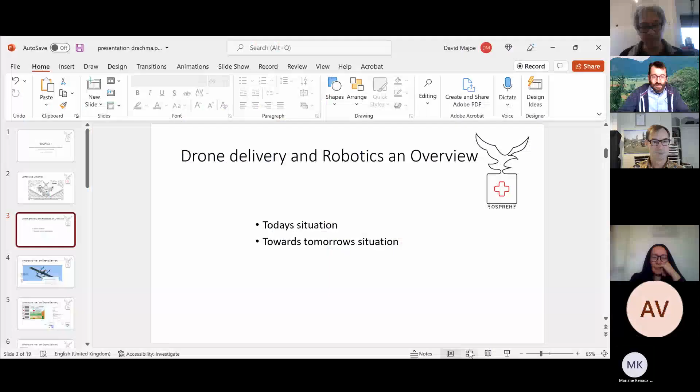If you hit the button that says share with the arrow going up, I think we're all masters now. Paul, I think it's Dennis actually first up. I'm sorry, Dennis. When I click the button going up, it goes close share tray, but it doesn't show me the share tray, does it? Oh, okay, yes it does. Window, I'm hoping the presentation works in normal presentation mode. Yep. In which case, Dennis, that's looking fantastic. Thank you, David, for correcting me there. Do you end up seeing anything other than my screen? Well, we can. There you go. That's brilliant. OSPREH, optimizing speed, productivity, resilience, and efficiency in healthcare. That's your presentation. Fantastic, so I'll kick off.

It's 15:04, I've got up till 15:24. In theory, OSPREH stands for Optimizing Speed, Productivity, Resilience and Efficiency in Healthcare. It was a 1-year Innovate UK project which recently ended at the end of March - January to March. It was between 2 companies, Apian, who I think a lot of you know about, and Motion Robotics, perhaps less so.

During the project, we made a coffee cup, and this is the graphics we used. In fact, Paul, I gave you one - a coffee cup, I don't know if you still have it. This is Apian's logo, this is our logo, and OSPREH was the logo for the project.

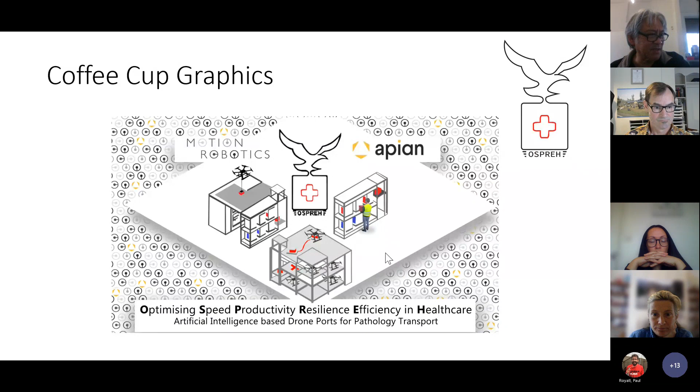As you can see here, we've got little drones and parcels, and it's really much looking at artificial intelligence-based drone ports for pathology transport - that was the emphasis. It was in the robotics AI call, looking at resilience in healthcare. What I'd like to do is give you a little bit of an update on the results we had during the project. But before that, I'd like to put it into the context of how I see drone delivery and robotics being merged together, both in today's situation, from what I can see.

I don't have eyes everywhere - I'm sure you may know of other people doing wonderful things. So what I'm going to present is only what I've seen in the past months and years. So today's situation, and then our results will hopefully show towards tomorrow's situation.

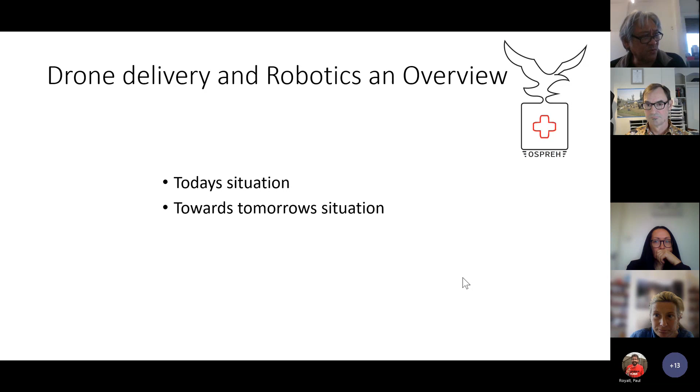Another similar drone delivery system that's working is Manna, operating in the home delivery space. I don't think they're operating at long range, and I think they're mainly operating in areas in Ireland that have geographical disadvantage for delivery by road. I think their payloads are fairly light, consisting of mainly shopping items, coffee, snacks, and so on.

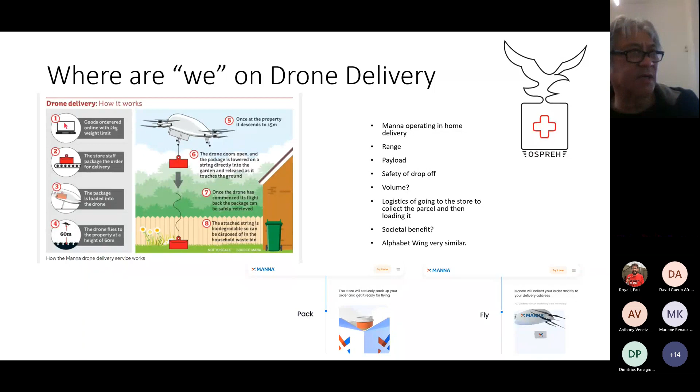So our good friends Apian, operating in the NHS space, they're looking at speed as being one of the main factors they can bring to deliveries in the NHS. They're already demonstrating their range from Queen Alexandra in Portsmouth to St. Mary's on the Isle of Wight, reasonably large payloads and increasing.

They're looking at means to increase ease of loading and drop-off. Not sure that they are focusing on volume, but they are a serious healthcare customer, so they're working in a space that's very credible. And I do believe that Apian and Motion Robotics have the same future vision of how more efficient and effective drone delivery has to be.

One of the most possibly successful in drone delivery right now is Matternet, looking again at the medical space with a very high international presence. I don't think they're looking at very long range. The drones are fairly small, and the payload is intentionally small—small blood samples and so on.

And they're concentrating with their robotic systems, focusing on safety and ease of takeoff and drop-off, which is good. I don't think they're concentrating on high volume, but they are looking at stuff related to societal benefit, and they are serious users of the technology.

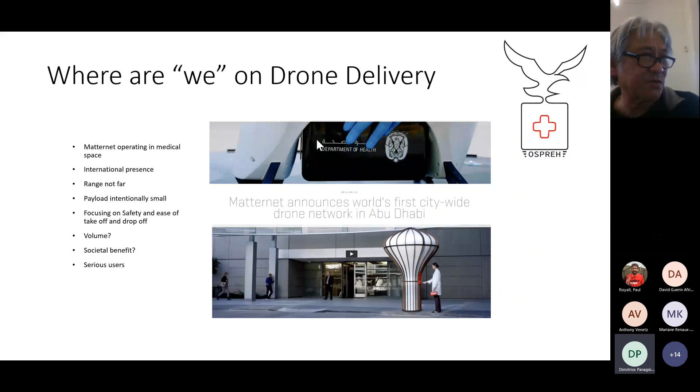So that just gives you my impression of a little bit of an overview of what's happening in the industry. And as I say, there may be a heck of a lot more going on. But I thought, what do we see in terms of automation and robotics?

One of the things is more and more people are talking about winched deliveries. Why? Because it's fast and there's no need to land. But this only partially avoids the safety issue, because you still don't want to drop a parcel, even by winch, onto a dog or something.

A lot of the winch systems rely purely on a hook, and you see the parcel actually swinging around as the drone flies, which is rather bad, I think. And even the basic winched approach over 30 meters, you're going to get a lot of pendulosity in even the slightest of winds.

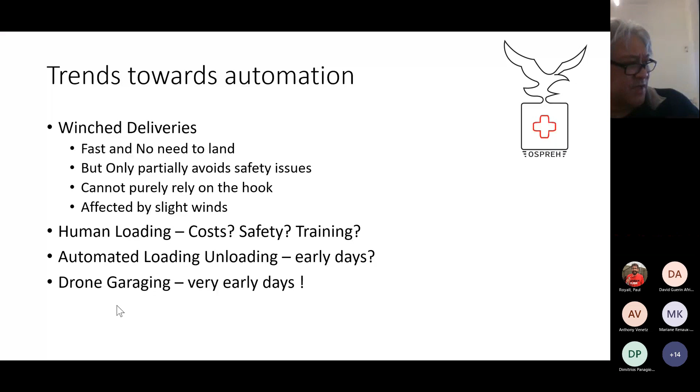Human loading is almost always used in this case, and therefore we wonder about the cost, safety, and the training. Automated loading and unloading—no, we don't see this at all in terms of automation. As far as I've seen, there are only a few instances, which we'll look at later. And in terms of drone garaging, where we're going to put the drones at night, it's very early days.

Looking at the winch, these are examples of winch systems. This one by Zing is almost a toy application. The Daiwa winch is much more professional—it's specifically designed to work with the Pixhawk, which is a very common flight controller.

Motion Now, just as an example of another, it's very expensive, but it does apply to a lot of different drone use cases, like water sampling, package delivery, and so on.

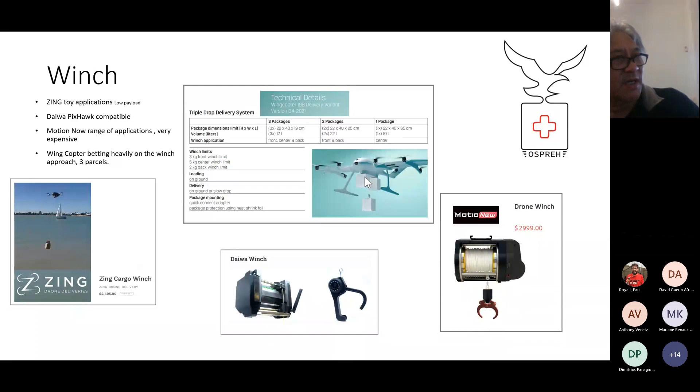But one of the very strong contenders in the winch space is Wingcopter, and here is one of their 3-parcel triple drop delivery systems, which they're very happy about. I think reasonably high payloads, but again, you can see how the system works—it still can swing around as an underslung load.

If we look at human loading and unloading, well, why should we be worried about automation? One reason is human labor costs.

Obviously, if we're loading purely by humans, or unloading, we have to have someone there all the time, or many people. Even Matternet is still showing some of its products using human loading, although some is by automated loading. Wing, Canada Post, these top companies are still demonstrating their services with human loading.

My question really is, how are you going to deal with the safety cases with human loading? How are they going to be trained to do this, having specialist personnel to look after it, and accountability? Do we blame the person who loaded it for when it fails? And then volume, how can you do this at scale when you have so many humans involved?

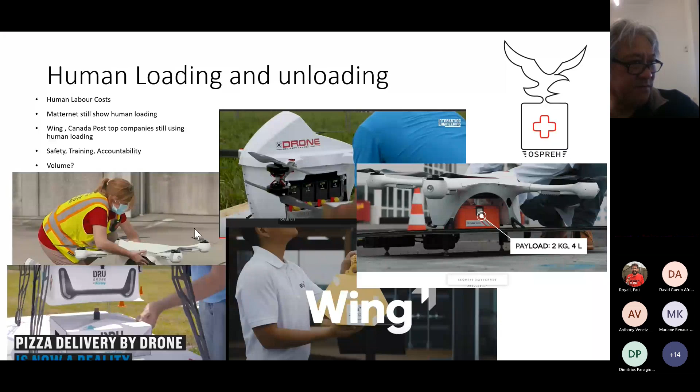Automated loading, this is an example of Matternet. It's still not widespread, but Matternet showing their little pod here. This goes into there, and on a little belt, it goes up into the drone.

Amazon, I found, was the most advanced. They have conveyors in the warehouse which bring the product to the drone, and then the drone is taken on rail tracks to the takeoff pad outside.

Volocopter, they are showing this very, very heavy lift drone here, but as far as I understand it, this is purely a static demo. It's not actually active.

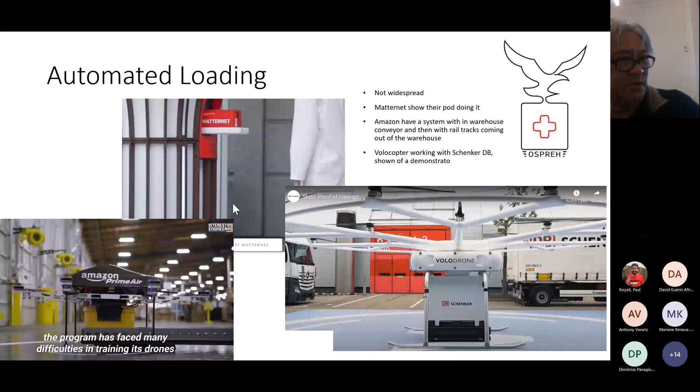Right, drone garaging. Why do we need drone garaging? Well, what do you do when you want to charge the drone? What do you do when you want to inspect it? What do you do when you're not using it? You need to put it somewhere.

If you look at the cases of Wing's drone delivery service, they're basically leaving them outside, as far as I can see, for a long time. Again, access is by humans to collect them, to check them, to charge them. And the closest as an overall solution is the drone in a box, but that doesn't map into deliveries.

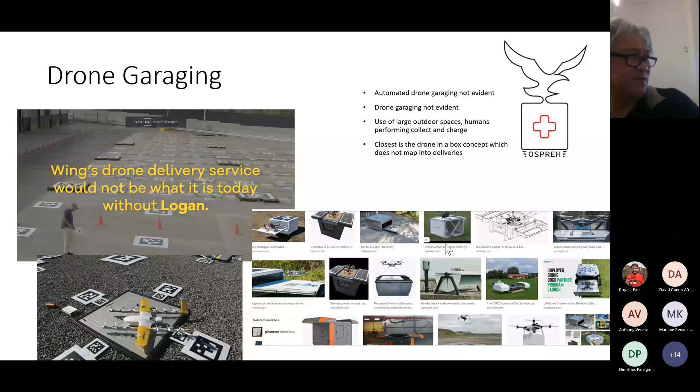So what I want to start now, because I'm halfway through this, I should have enough time to finish in 20 minutes. Motion Robotics' work in OSPREH, we looked at parcel handling and automated drone garaging, so parcel handling includes parcel loading, parcel unloading, parcel lockering, and automated drone garaging. Hopefully now, if everything works, we can see some of the results of the project.

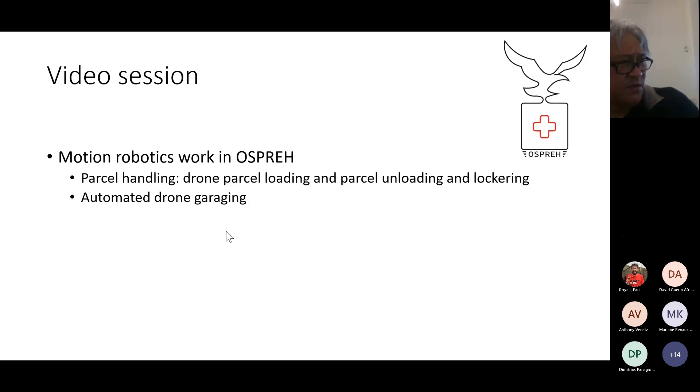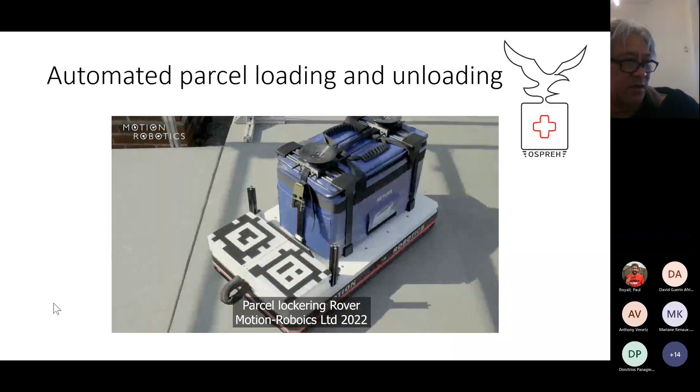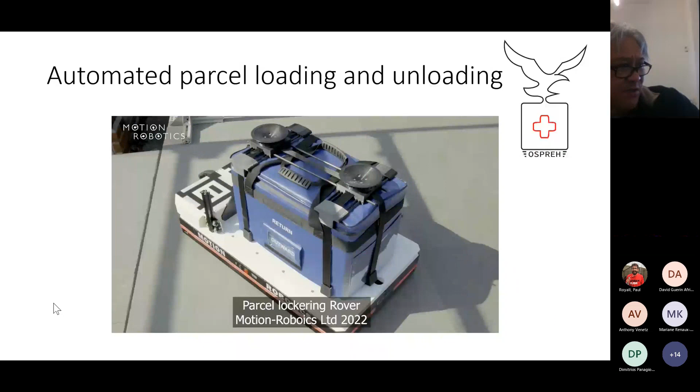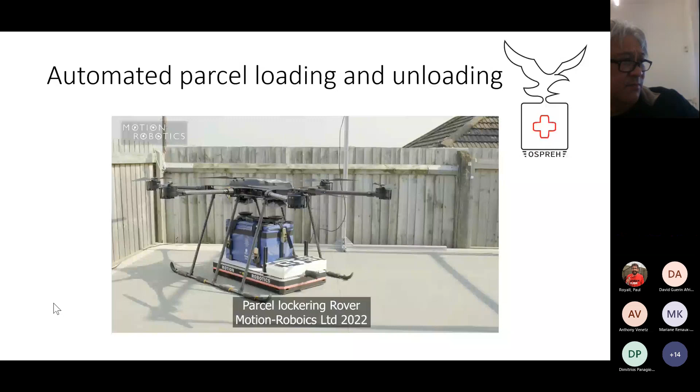So what you're seeing is our parcel loading, unloading, lockering rover. It is omnidirectional in its capabilities. On top of it is a VersaPack medium size, used very much by the NHS, pretty much standard equipment as far as, for example, deliveries between Portsmouth and Isle of Wight. The drone is Titan, our hexcopter, which we use.

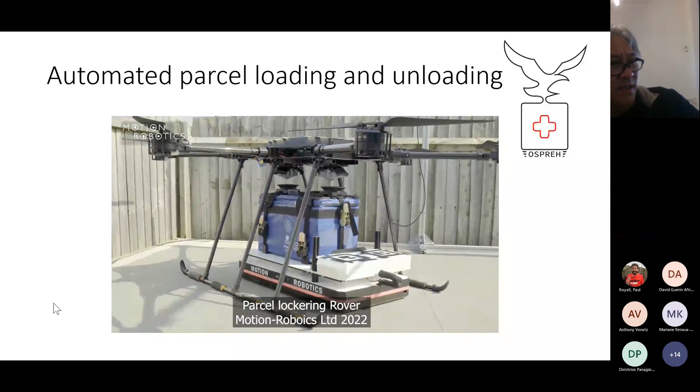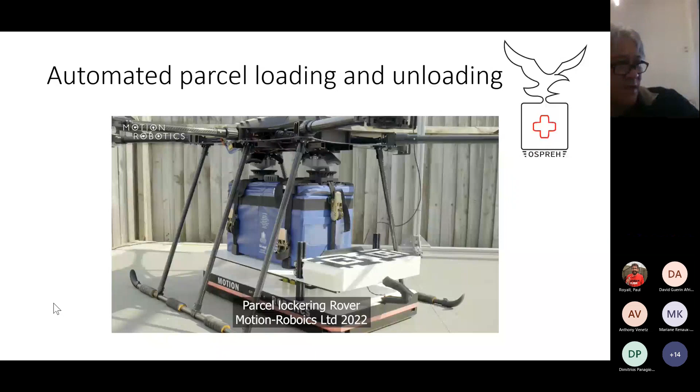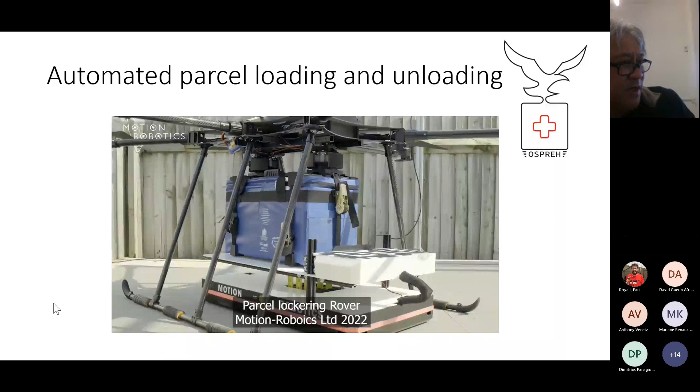As you can see here, the parcel rover is now activating the lift and bringing the parcel towards the grippers, which are underneath the Titan drone. The idea here is that the grippers can accept a certain amount of error between the positioning of the rover and the drone, but obviously we try to minimize that. This is actually fully autonomous, no manual control in it.

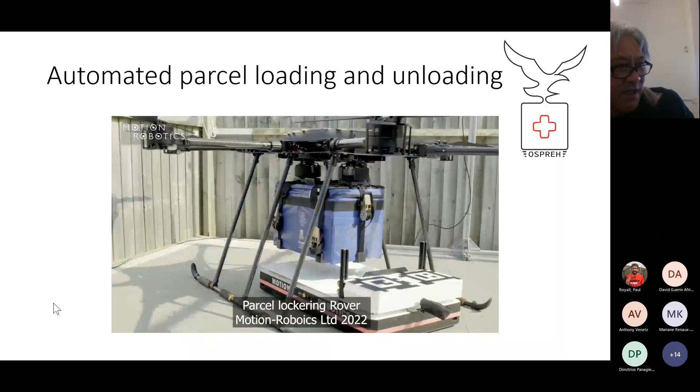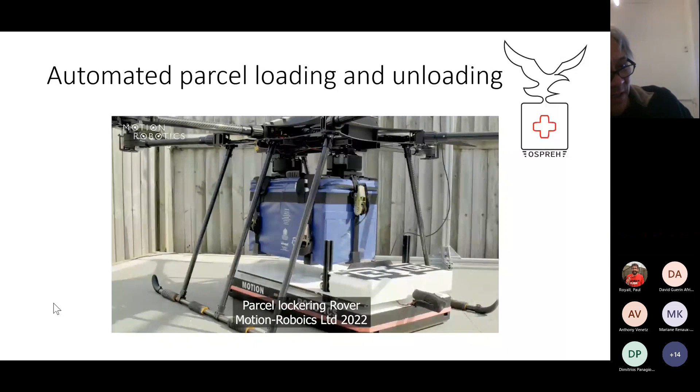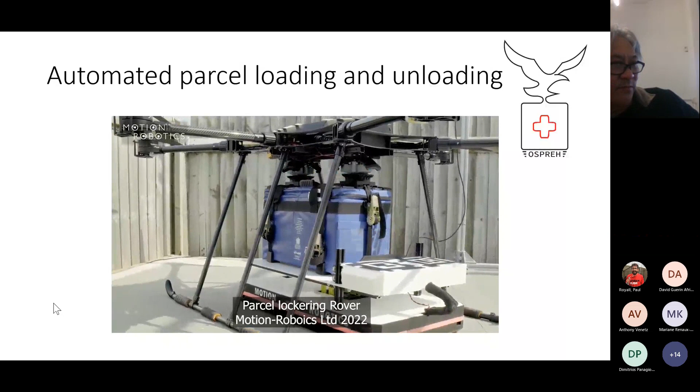This is an example of drone unloading. So the drone has landed, we come up to it, and so that we don't drop the parcel from height, the lift on the rover climbs up, the grippers release, and let's see, I could speed up a bit for sake of time.

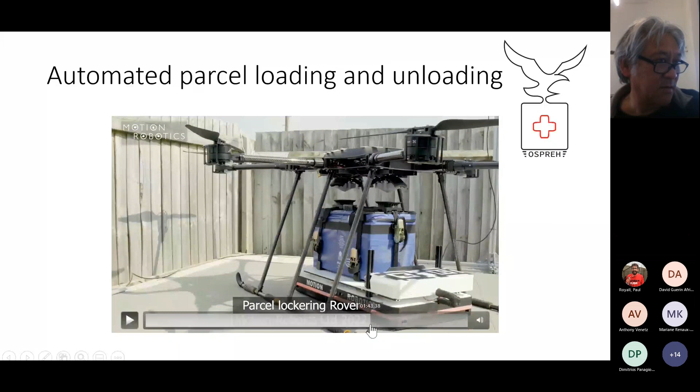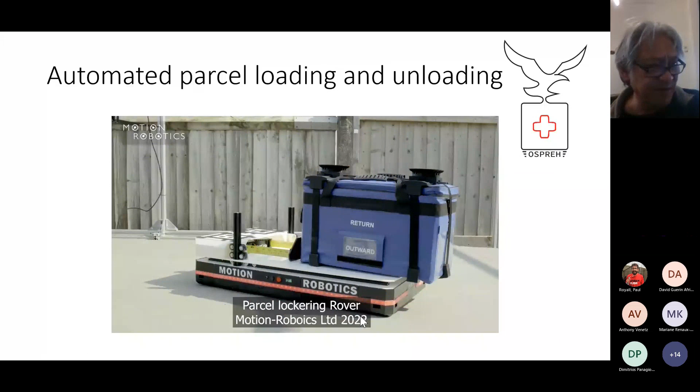There, and here we see, assume that now he's at the locker. He pushes it onto a shelf in the locker space. Well, not as badly as this, but effectively onto a shelf, and then goes off to do other things.

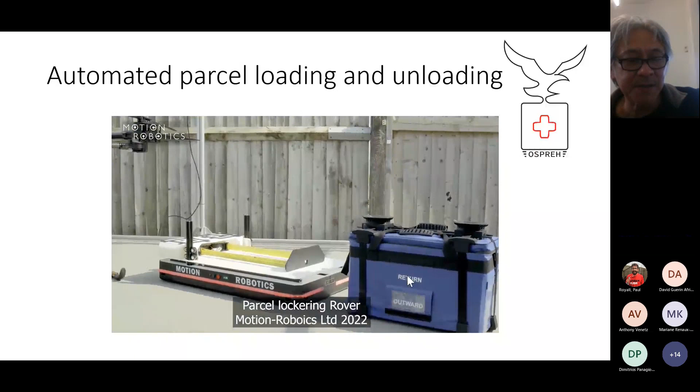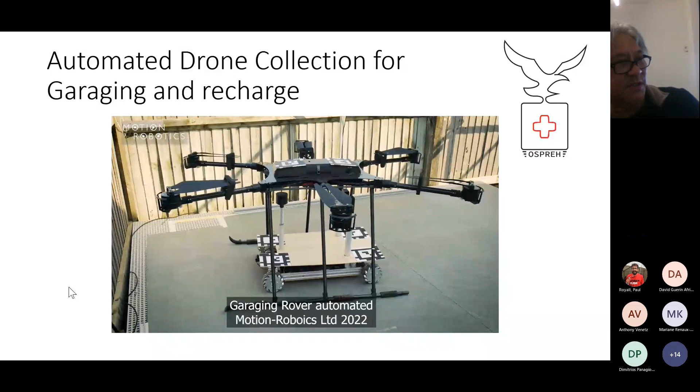Okay, so this is a demonstration of the automated drone collection for garaging and recharge. Again, you see the Titan drone, and we have what is called our garaging rover. We're designing these rovers to be drone agnostic as far as possible, within the limitations between different manufacturers, but we try to ensure the coupling mechanisms are as tailorable as possible.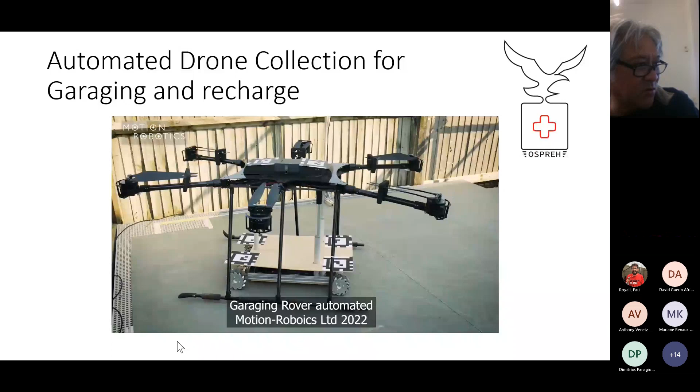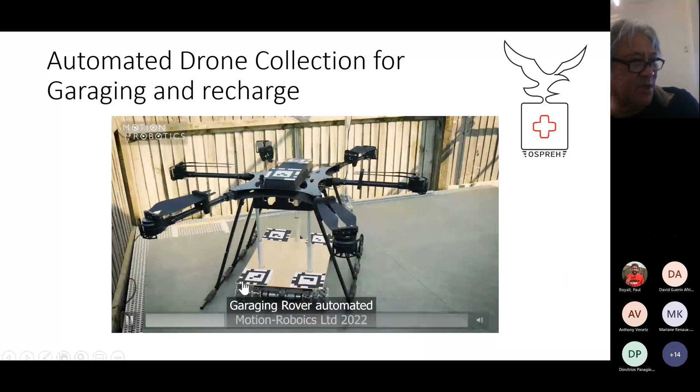So here again, it is a bit slow, it's a prototype, so it's a bit shaky. But essentially, positioning of the rover is done through so-called AprilTag visual markers, using cameras above the platform.

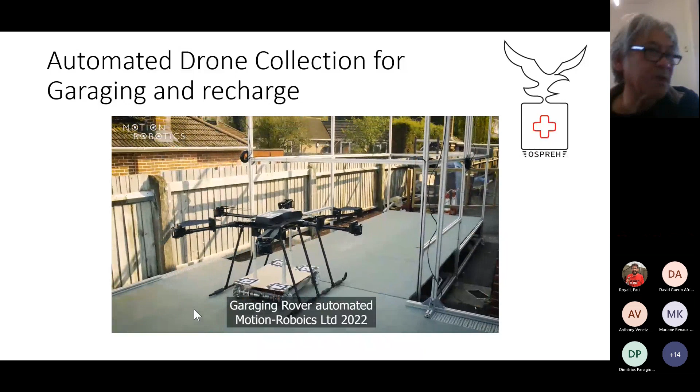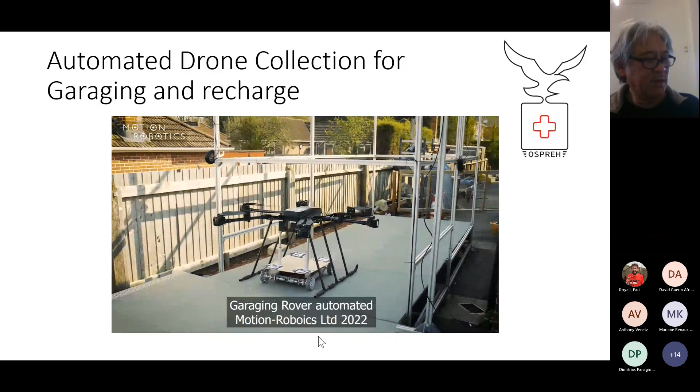We assume here, for example, he's entered into his garage, and we get him dropping him off. Just let me check my phone for the time, because I can't see the time. Okay, so here we see him dropping that off.

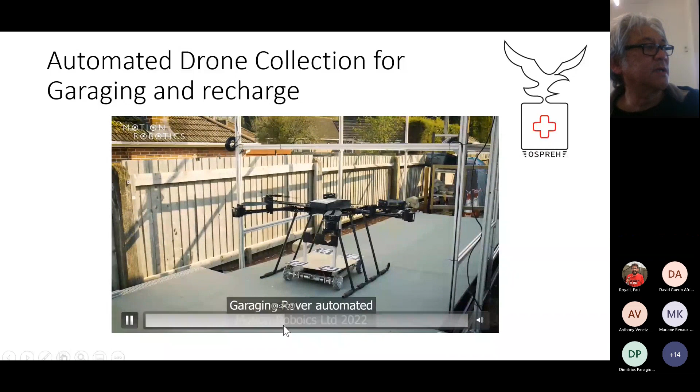And he goes away, so I'll just spin through that. Here's another example. There you go.

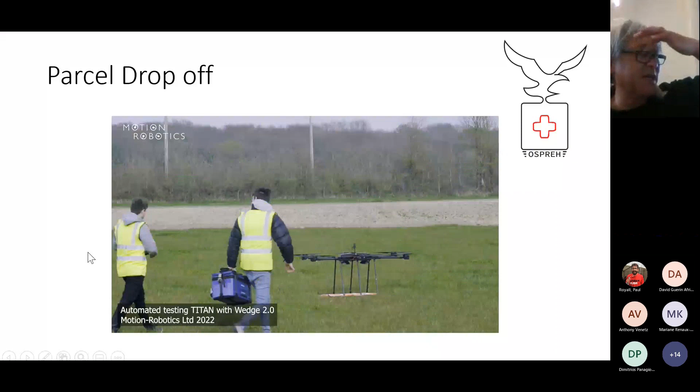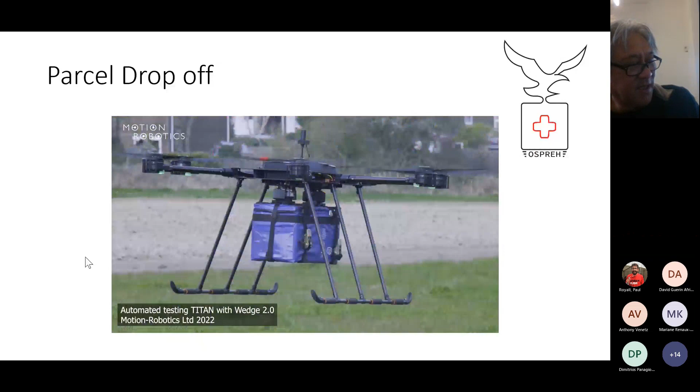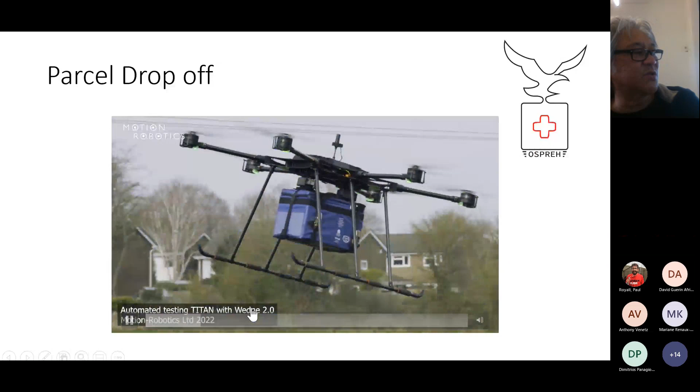So, parcel drop-off. What we're trying to show here is a situation where you're loading it manually, not automatically. Since you already saw us loading it automatically, you can assume this is a parcel going to somewhere where there is no infrastructure. This is mainly to show what we call the wedge, the device that holds onto the parcel, and also to demonstrate our pinpoint landing accuracy.

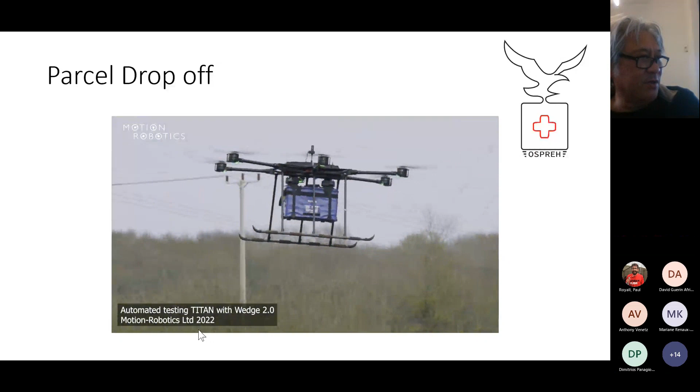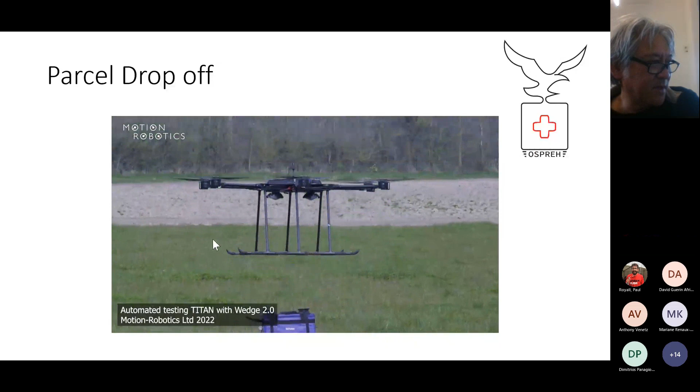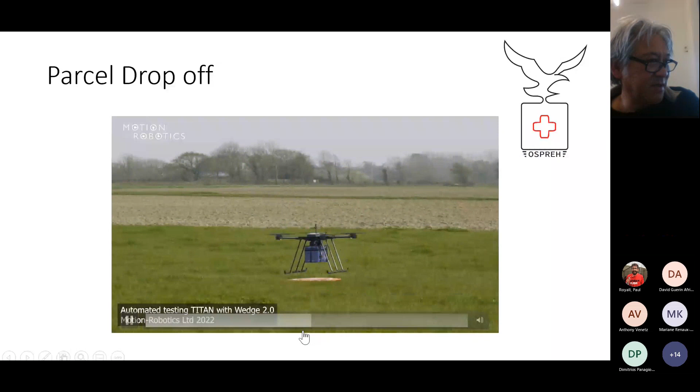This has been carried out at a farm close to our offices, and pretty much we get within 10 centimeters every time. Here you can see the drop-off of the parcel, and then obviously the drone would take off. Essentially, let me get my mouse back, fly back home. If I speed that up, we can see again here, very accurate landing and drop-off.

I talked about the winch. What we have on our systems is a combination of the winch and wedge mechanisms. The wedge mechanism ensures the parcel is not going to be rocking around, vibrated, or pendulous, but here is included our winch mechanism.

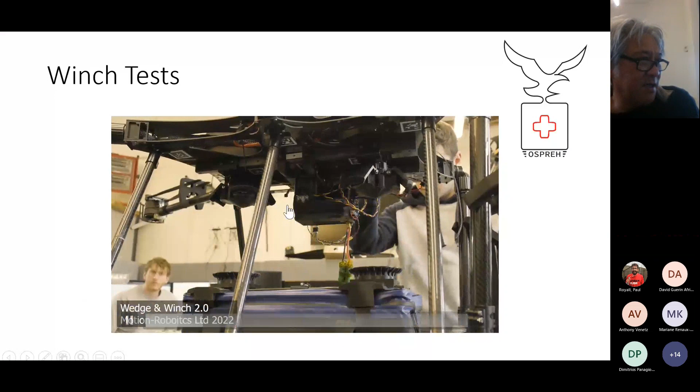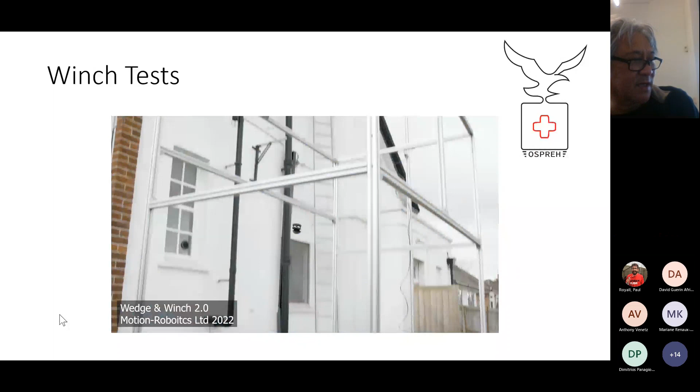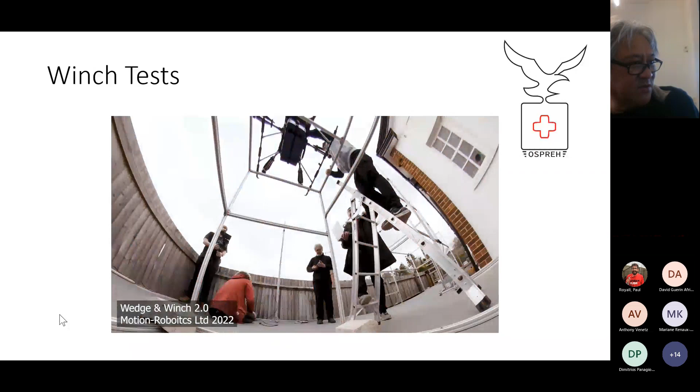So have a look at this. This is in the lab. As you can see, there is an automatic release of the mechanism that holds onto the parcel as soon as there's no more gravitational force, it will release the parcel. This is a typical test where we have to do multiple tests to prove the principle.

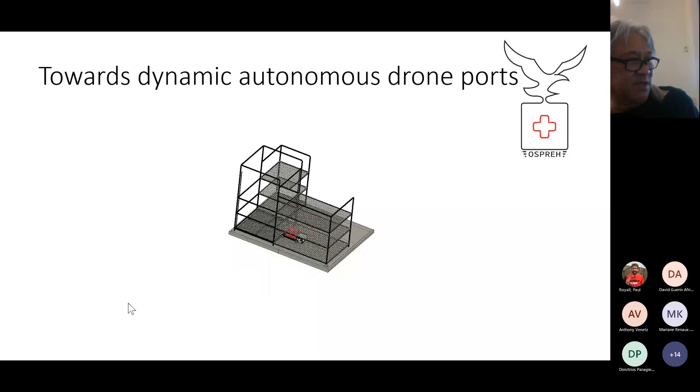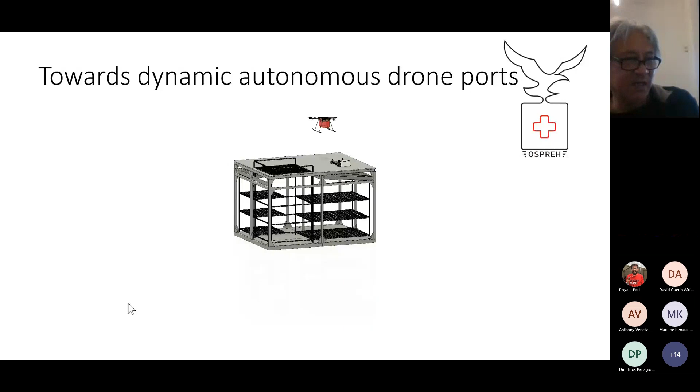And finally, this video here is to show you an early animation of how typically this would operate in practice. This was the vision behind the OSPREH project, where there would be a structure, drones and rovers and parcels, and drones would fly in and be automatically loaded, and the rovers would return, and the drones would take off, in reverse, including drone garaging, where the drones would end up being garaged in these corridors.

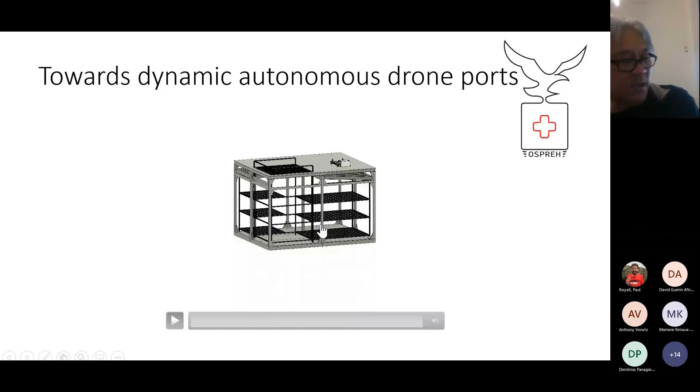So in conclusion, what we've done is show you our progress in the project towards automation of cargo handling, primarily looking at removal of human in the loop for cost and safety reasons, achieving this by leveraging AI and machine learning techniques at the level of embedded systems. The project also carried out a bunch of other AI work, which probably we can talk about at another session. So that's the conclusion. Any questions? And thank you.

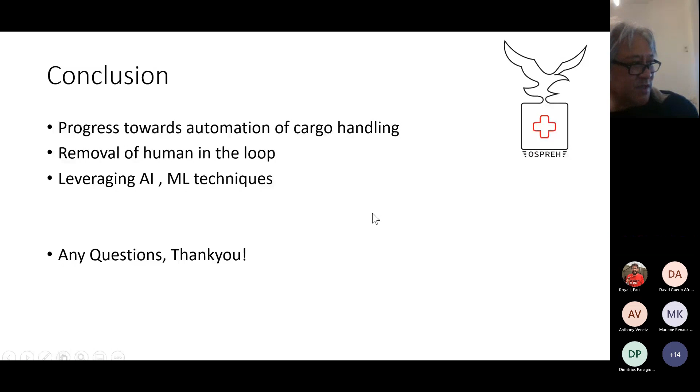Dennis, that was absolutely fantastic. I think you're muted, Paul. Hello, thank you, I'm hopeless today, I do apologize. Thank you very much, Dennis, that was absolutely fantastic, sorry about being muted there. Anne-Lise, you've got a fantastic question in the chat, do you want to ask it? And now Anne-Lise is doing the same thing as me. You're muted, Anne-Lise. I know, and I mean, you would have thought we would have sorted this one out by now, but not yet.

So thanks, Dennis, it was extremely interesting, and I have a question regarding whether you had the opportunity to discuss your approach with medical teams or quality managers in terms of how it compares versus the current status of manual handling in road transport. I was thinking, how do they react in terms of chain of custody, or contamination risk? Basically, what's the point of view from a purely medical standpoint, not a CAA standpoint, their own standpoint?

Okay, good question. We've had several meetings with NHS Trust Management, where they all favor an automated process because the porters' work role only covers a certain amount, and they don't want specific extra staff to do the loading and unloading, for health and safety reasons, also for training aspects. So from their point of view, at the level of personnel, they're looking for automation. That's one strong feedback we had.

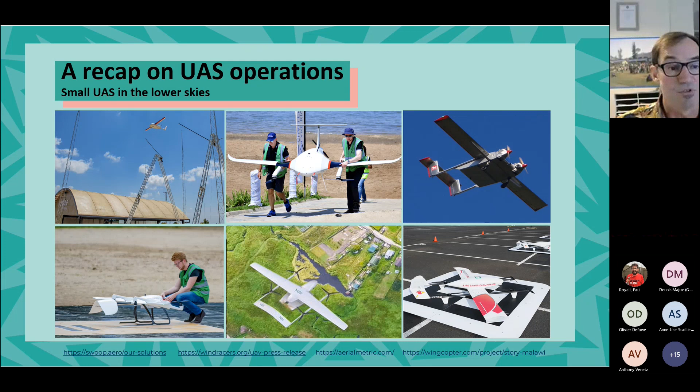And when you get into the heavier platforms, the risk becomes higher, the opportunity for harm to those on the ground, conflict with other airspace users, etc. By the way, some of these platforms have recovery systems, parachutes on board, and that's a pretty interesting thing to consider if you're getting into this game. You really want to consider the risk, and I'll touch on that.

These are the sort of drones that we're not talking about. If they do happen to crash, out of control, they cause a lot more harm. They generally have a lot longer range, so they can impact airspace for a longer time. And there are trade-offs, of course - it's nice to have a larger payload. Sometimes, though, and we have some experts here, and I really call out Olivier from Village Reach on his knowledge, you don't need to move much around. So smaller packaging can be quite invaluable, in fact.

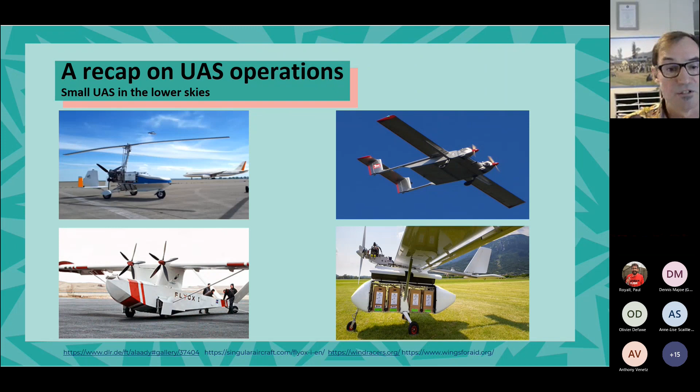There's also the point Dennis was talking about, whether you winch down or land and take off. If you land and take off, you need to train the medical staff on how to be safe, how to load and unload the cargo on a drone. That's a really interesting point.

Why drones? Well, I love this photo - I mean, I hate this photo as well, but this is what it's like, as you probably well know, in the global south. Only 34% of Africans live within 2 kilometres of all-weather roads. It's 90% in East Asia, and a lot better across most of Western Europe. It costs a lot to commute between these places, to deliver.

When the monsoons arrive, the roads are a mess, and that's when drones are least effective because sometimes they're not efficient in bad weather. There's a lot of critical supply chains that fail. The rural dispensaries run out of stock, the stock goes out of date, and blood tests, for example, the classic example, they spoil in transit.

And then also there's the road safety factor. Road deaths are the third biggest cause of death in Africa, after HIV and malaria. 20% of the road fatalities worldwide occur in Africa, yet it only has 2% of the world's vehicles.

Other factors - you might want to try and deliver antivenom. There's 1 million snake bites a year in sub-Saharan Africa, around 30,000 deaths from that. And then repairing these roads is prohibitively expensive.

So innovative solutions are good. The African Union realises this - the Executive Council in the Education, Science and Technical sessions adopted, I think 4 years ago, an approach to prioritise 3 key emerging technologies, one of those being drones.

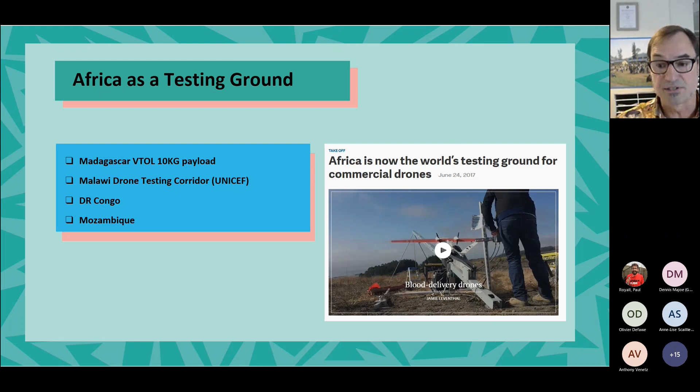It's got a great range, it delivers a small but essential package, and it's got a parachute on board. Malawi is a leader in drone delivery efforts - 2 companies provide regular service through UNICEF, outside of the UNICEF and Malawi government drone corridor, across large regions. But there are a lot of complexities with having various drone operators and lots of operations.

Zipline, I think we all heard of Zipline. They're operating in Rwanda, Ghana, Japan. Agreements come up in Nigeria, Cote d'Ivoire, Kenya, India, Philippines, Japan. They do whole blood, platelets, plasma, and some of the figures are quite amazing - the number of blood deliveries that rely now on Zipline are really high, and they're delivering COVID vaccines, as are other companies. It's a quick drone, it's light, it doesn't have wheels on board. It's an incredibly robust system from what I've seen, the flight management system and the automation - one pilot can have 30 odd drones flying, and this reduces stock out significantly.

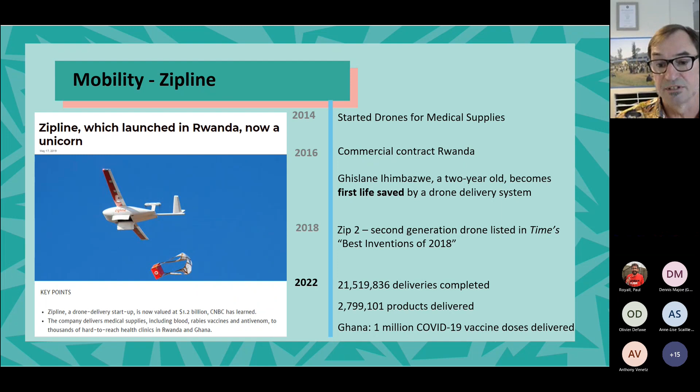I quickly compare Europe with Africa, because there's a similar number of countries, similar size, populations aren't dissimilar. Africa has 55 member states. Yet the regulatory framework in Europe for small UAS of 150 kilos and below - it's common across all European member states. We were part of that in the UK until Brexit, we still have some alignment but that will change. So interesting - if we can do that in Europe, why can't we do the same in Africa?

Language barriers are common across Europe and Africa. A third of Africa is Francophone, a third Anglophone, 5 or 6 Portuguese, etc. These are barriers that we've overcome in Europe, and there will be massive advantages to this, and these advantages will flow down into medical delivery and supplies.

The World Bank and the African Drone Forum have identified the gaps where we could put in effort to support the drone ecosystem. There are 7 documents, knowledge pieces - most of them haven't been published yet, they're held up in the publications mill at the moment, but they will come out shortly. A really important one is number 1, the playbook for enabling civilian drone operations. That's going to be really, really valuable for everyone involved in industry. When it comes out, grab it, have a look through it.

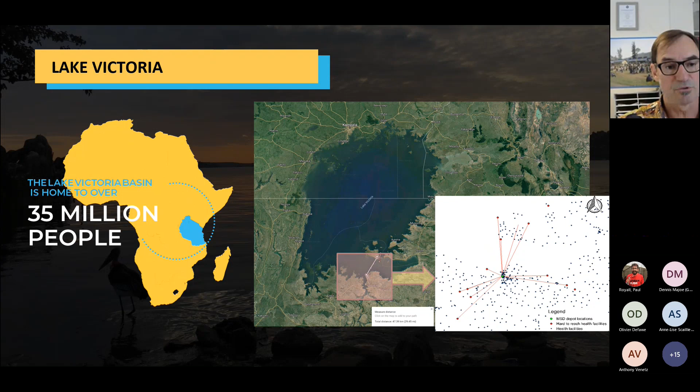Let's go back to Lake Victoria, the second largest lake. It covers 3 countries: Kenya to the northeast, Uganda to the northwest, and Tanzania in the south. If we look at the southern section, we were flying out of Mwanza in 2018 on the shores, delivering to Juma Island. That insert in the bottom right shows the 300 medical supplies facilities and depots - mostly difficult to reach, some very hard to reach. We were trying to replicate how that would work, but you can see how many locations there are that people struggle to get medicines to. The people working there are unable to get supplies.

This is a concept I came up with a while ago: we could use a range of drones, hub and spoke, around the lake. There are over 3,000 islets on the lake. I don't know how many are populated, but many have health facilities, and stockouts are a major issue - malaria, HIV, AIDS, bilharzia, etc. People have a terrible time here. There are 57 drone ports on this particular map, and you can service them with one larger drone doing a range of drops in one day, or a whole lot of smaller drones having multiple flights.

So we focused on drone ports on the coast to reduce the risk of overflying people. We had to consider the weather - the weather forecasts are either non-existent or inaccurate, especially for the low flights or low altitude flights. These are different risks from what you'd experience in the medical fields, but I'm sure you get the idea. Aviation risk hasn't changed over the decades - well, it's improved certainly, but now we have to consider ground risk as well. With people on board the plane, we don't consider ground risk because we're already automatically saving people's lives on board. But now with no one on board the drone, we have to bring in this extra consideration.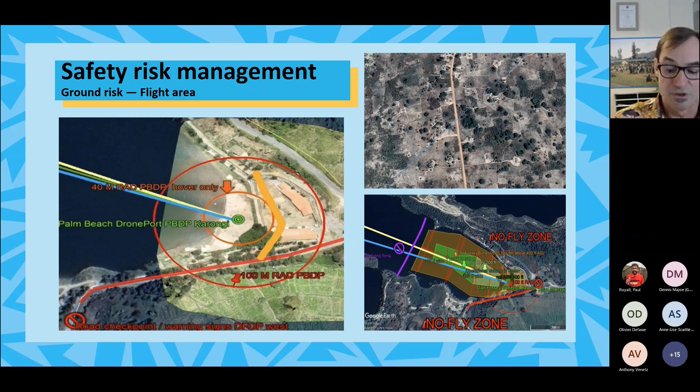The top right photo, that's a World Food Programme effort delivering cargo into northern Mozambique, I think it's the Cabo Delgado area. And so that's a town that's not on the map. And there are towns that are marked on the map and not there - towns that are in situ but not on the map. So data quality is a real problem.

Operational safety, you need to track drones quite often. The center top picture is one of our friends from Switzerland putting a receiver, a tracking device to track drones, on a rock in the middle of the lake because there's no infrastructure. The picture below it with the red lines, we used the mobile cell network in Rwanda to track all of our drones, so it was a lot easier. But there are issues with infrastructure, with electricity supply, with having the right SIM cards, for example.

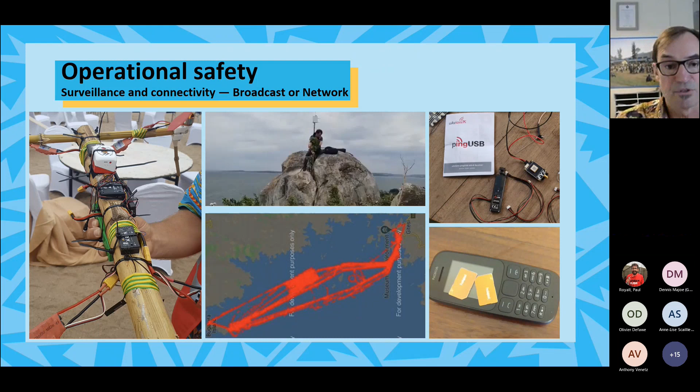And then there are these other problems, birds, wildlife, really essential stuff. Oh, hang on, that's probably my reminder that I have to stop soon.

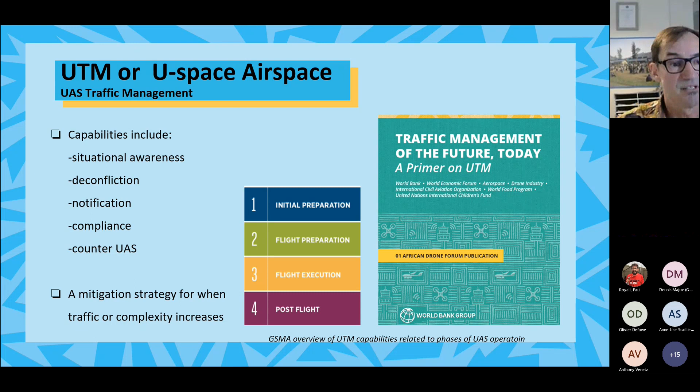When the flight operations become more complex or higher risk or carry more dangerous goods or operate near people, etc., you need some sort of traffic management service provision. These are expensive, complex, and still being designed. So there are a lot of future operations that we can consider.

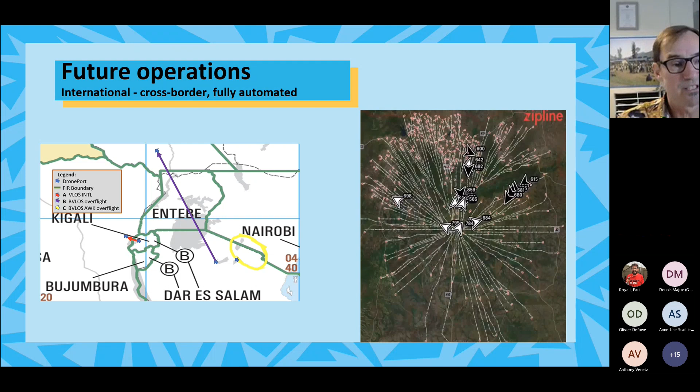Cross-border and international flights are different. Cross-border means one company can operate in various different countries or localities, whereas international flights means you could take off from Tanzania, overfly Uganda and land to the north, or you could make a delivery. Olivier's with us on this call and we've tried this from the Congo to Rwanda, for example. These bring up a whole lot of different international regulations that we have to consider.

Just in closing, I want to quickly talk about drone operations flying manuals. The manual is where you take all that information I showed you before into the specific operations risk assessment. You look at drone importation problems, frequency spectrum, if you have any cameras on board, how do you manage the data and the privacy of those you overfly?

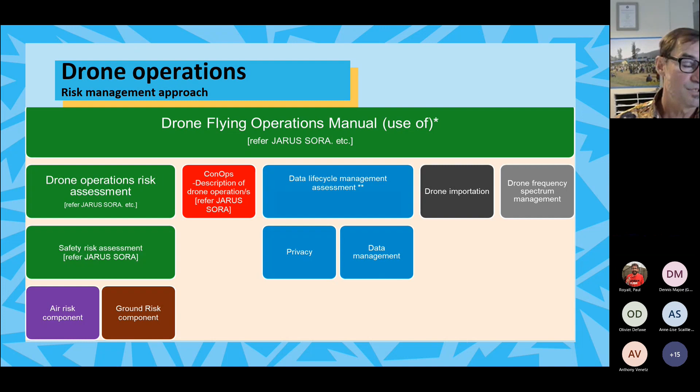On the bottom left, we start looking at the air risk and the ground risk, and I'll expand on that. The concept of operations describes the operation that you want to fly, that you intend to fly, and then you do a full risk assessment. It includes safety, as I mentioned before, air and ground risk, but also security.

You don't want to be hacked. Occupational health and safety for your staff. Geophysical risk, flying cross-border, flying near borders, and then environmental hazards. There are a large number of factors here.

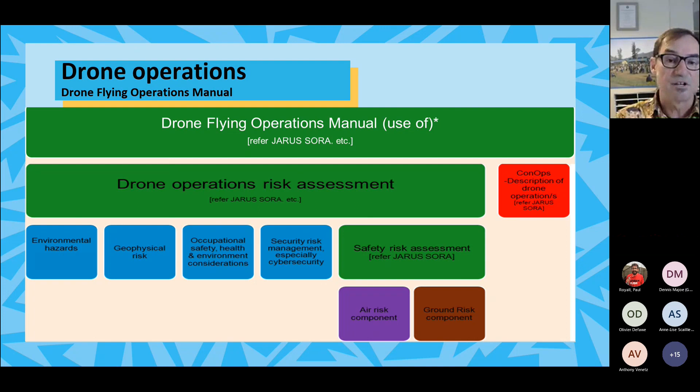One of the most important is outreach to communities. In a lot of these places, people have never seen a drone. They don't know what a drone is going to do, and they could feel that they're at risk of losing their job. So thank you very much for listening to this, and I don't know if you want to do questions now or later on.

David, that was absolutely tremendous. So we've kept a high level from Dennis's to yours. That was brilliant. I've got a couple of questions now. So what have I got here?

I've got a question from Andy. Do you want to unmute yourself, Andy? And it's about uniformity across airspace regulations, I think. Andy, are you there? Here he is. Yep, I am. Hi, David. Really good presentation. Nice to see you again after last week.

My question was also with the airspace. Around the fact that the lack of uniformity, is that not potentially giving a bit of an opportunity as well as a sort of challenge? Because if you're flying within the same country, surely you're having to comply with fewer sort of uniform standards. Are you referring to flying within the UK or flying in many of the places? In Africa, where there were lots of different, it was sort of a patchwork of different standards.

That's a great question. I think possibly a lot of it comes down to the capacity and skill set of the Civil Aviation Authority. Many Civil Aviation Authority employees don't really understand drones. It's not part of their day-to-day job. It's also not a revenue earner in countries. So if one particular inspector thinks that it's fine, they may not understand some of the intricacies of it. They might allow it in one country, and exactly the same operation may not occur in another country. So capacity building is an essential piece.

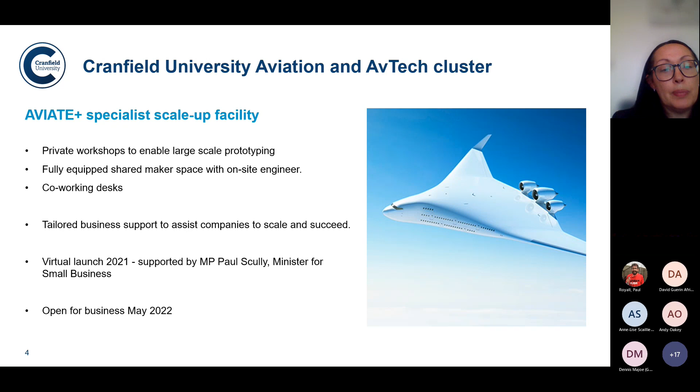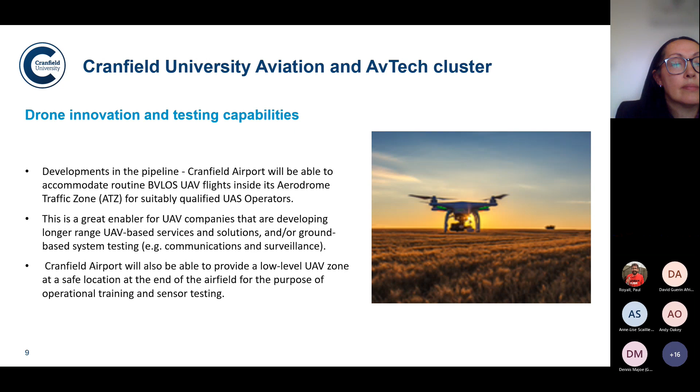So why Cranfield? In terms of attracting small businesses, I think we have a unique combination of technical expertise, access to Cranfield's world-class academic research, and business support. We have our Bettany Centre for Entrepreneurship, who can support companies on their business needs. We can tap into our Barclays Eagle Lab nationwide ecosystem, and we also have 2 Royal Society entrepreneurs in residence.

We have world-class facilities, obviously Cranfield's Global Research Airport, which includes the recently opened Digital Aviation Research and Technology Centre, DARTEC. And we're a university specialising in postgraduate education, so we have the fantastic resource of highly skilled graduates who we can introduce to companies to work on projects, internships, KTPs and PhD opportunities.

Just highlighting some of the key benefits for businesses and innovators. We have a variety of membership options, so across the 2 facilities, we aim to be able to accommodate you wherever you are in your business journey and in terms of your requirements.

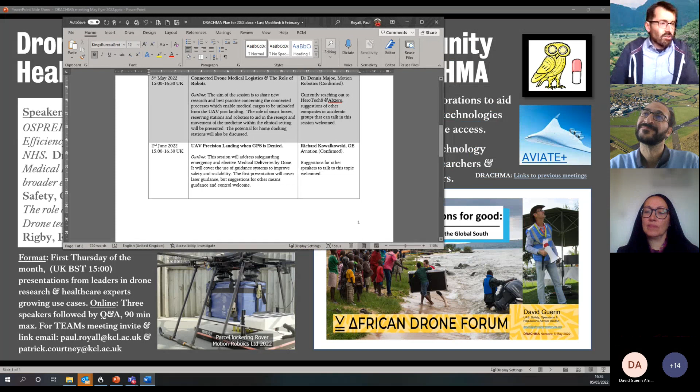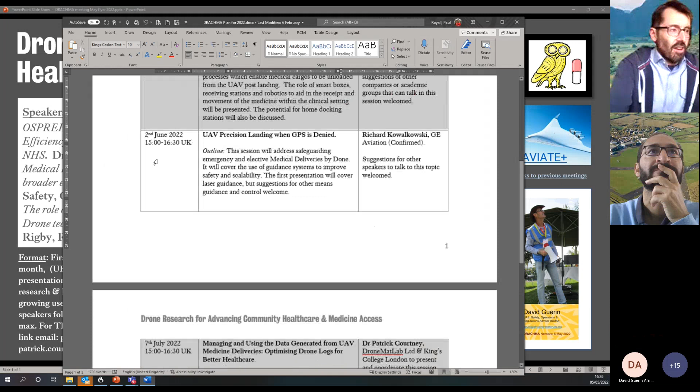Yeah, here we go. So while Demetrius is looking up those figures for everybody, I've just flashed up the plan for other presenters. We've got Richard from GE Aviation who wanted to speak about a very specific subject, which I thought was tremendous, about precision landing where GPS is denied. But I'm just thinking to the group, is there anybody that wants to speak about a particular subject, not necessarily precision landing? We can open it up a little bit, or if there's anybody within the network that would like me to approach a speaker.

Oh, Patrick's come in and come out again, so that's good. So while we're here, is there anybody that would like to speak about a drone related healthcare related subject? Or is there somebody you would like to hear from that I could go out and approach and invite in? And I think while you're thinking about that, Demetrius is going to come back with a number about altitude, taking more time than I would have hoped.

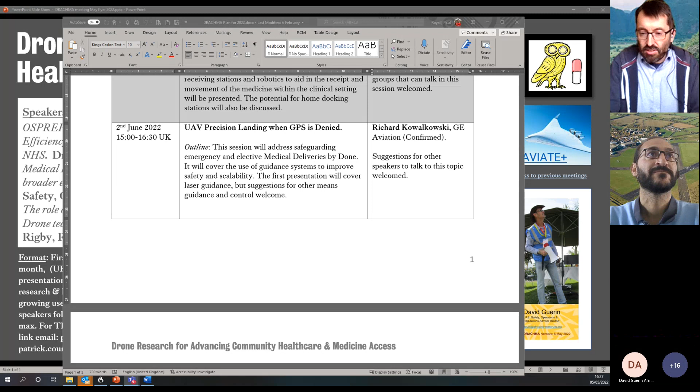Then I think after that we can bring the meeting to a close. I think it's been very successful. I think we've got some very good discussions going on, and I just want to thank all three speakers, Veronica, David, and Dennis, and your good self, Demetrius, as well. That was brilliant. I think we've learned a lot as a group. So thank you.

So before we close, any last comments? Any things that you would like to raise? I can see Dennis there. He's got his microphone on, I think - or has he just got? Oh, hi, Dennis. Yeah, sorry.

I'd like to catch up with Veronica offline with regard to the Cranfield stuff. I know a lot of the people you've been talking about, and I've been following them, and I'm interested to see how we could somehow overlap. Thank you. Yeah, fantastic, I'll be in touch, Dennis. Brilliant, there we go, we got a sale, which is good.